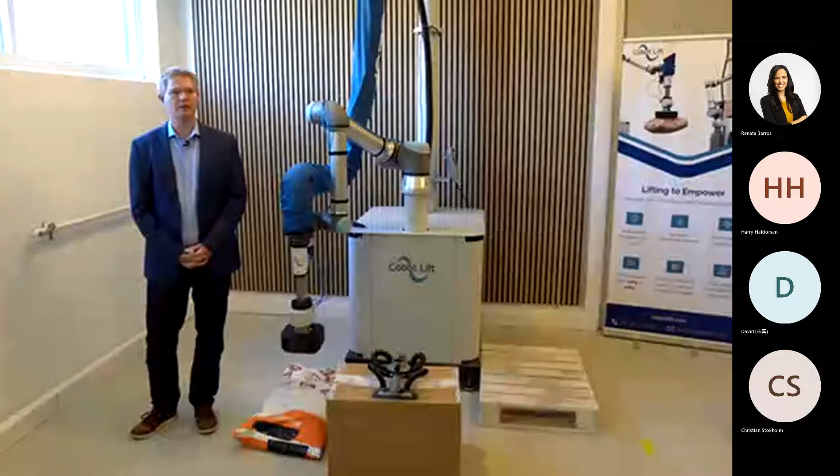My name is Henrik Gulløv. I'm the CEO of Cobot Lift and one of the founders as well. I'm very happy to have you here today to talk about sack handling and how we can use that to alleviate labor shortages in the food industry. We're going to do a few slides to give some context to our solution, and then afterwards do a live demo with the unit we have here next to us. This is a mobile Cobot Lift unit. If you have any questions or projects you're thinking about, don't hesitate to ask or reach out at the end. Just interrupt me wherever you need.

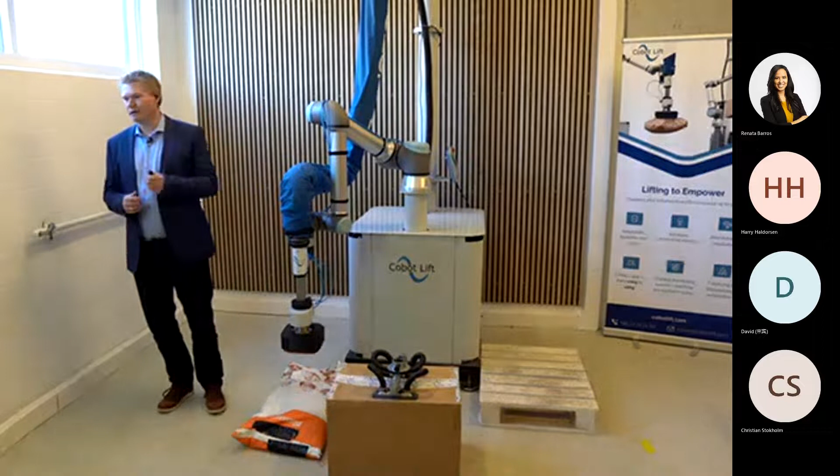So what we're going to talk about today is first a general introduction: what is Cobot Lift, our company, our technology, and then some of the cases we've done in the food handling industry, and then how you can potentially go from here.

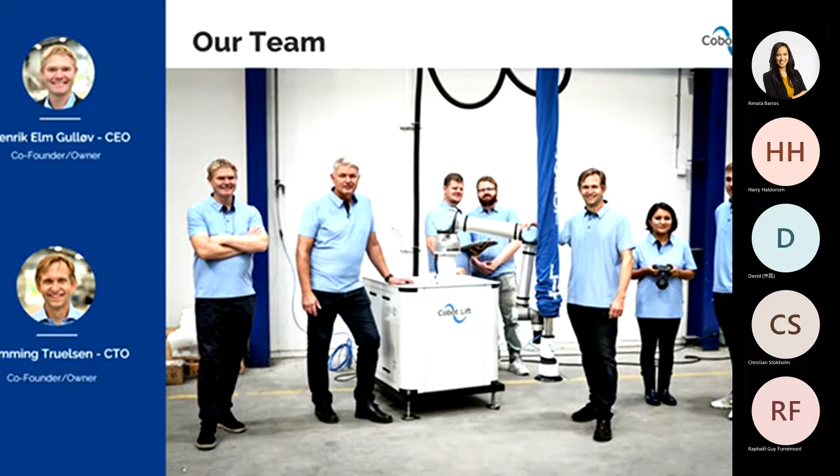So the team today, I'm the CEO, co-founder. The inventor of Cobot Lift is Flemming, he's our CTO. We are the original founders, and we are part of this big family of companies located here in Denmark, where a lot of robotics industries are being developed. There are more than 100 companies here.

Cobot Lift started 4 years ago, when Flemming was asked to develop a solution. He was working as an integrator for a robot brand, these collaborative robots, and the company he worked for did have sack handling, done manually or with just pure muscle power from the individual, which they didn't like for ergonomic reasons. They were also struggling to get people willing to work in this environment, running 3 shifts, 24/7 — a harsh environment with a lot of heavy lifting — and they needed an alternative. They did have industrial robots, but didn't need the speed of an industrial robot, didn't have the required space, and didn't like the price either. So they were looking for something in between: automation that was small but still handled the task of handling up to 5 sacks per minute.

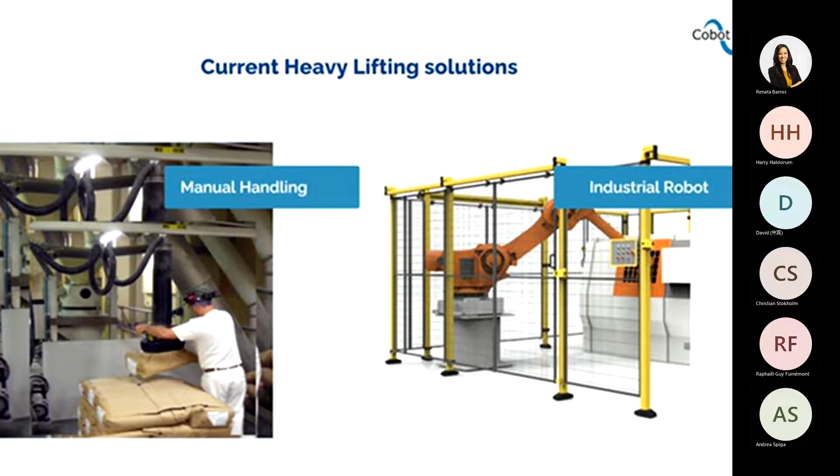That's actually the background — that was the solution we developed back then, and that's the reason why today we have customers across 4 continents and distributors in 27 countries. It's basically because of the Cobot Lift.

We can automate lifting up to 45 kilos. One of the things we're very good at automating is sacks, which is what's on the picture today, but we can of course also lift other things, and I'll show you some of those as well now that we have you here, because we often find customers need sack handling but might also be interested in other solutions.

The space we take up is similar to a human being, so we see a lot of places, for example in the food industry, where we're filling or depalletizing, putting product onto a mixer station where an operator is still working — still the same workspace required as a human being. And because it's collaborative, you don't need fences, so we can automate new places.

You don't have to build a new factory floor to automate. That's kind of our saying. And we're significantly cheaper than the industrial robot installation because it's much larger, needs fencing that drives a lot of cost.

But also because the technology around particularly camera vision systems is really increasing and has really developed. We're coming out now also with solutions including camera. I'll show you some of these solutions today.

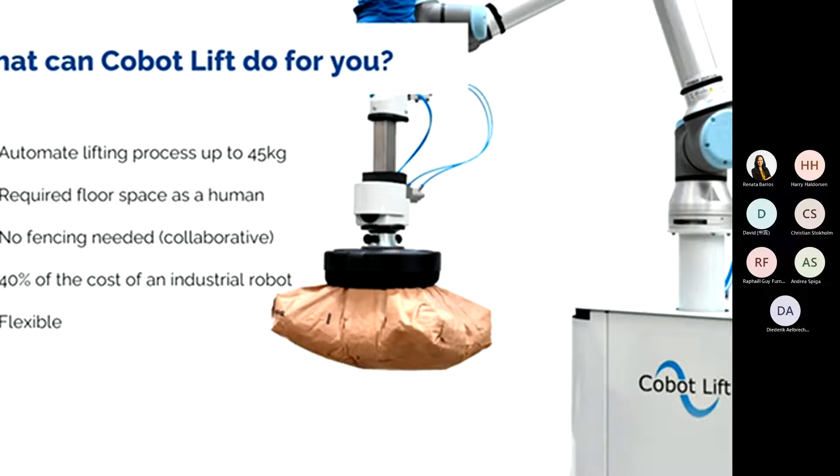The last point of the Cobot Lift is the flexibility, and it is flexible in several ways, but one is the ability to grip things that are different. So in this case, sacks handling, we can actually, with the same gripper at one customer, handle up to 100 different kinds of sacks. That's really important for our customers, that we can handle as large a part of their product portfolio as possible.

So just to get you introduced, what do we have in a Cobot Lift? We have our two main models here: a mobile Cobot Lift and a stationary Cobot Lift. The three ingredients that are in both of these units are a collaborative robot and a vacuum tube lift, that's really giving the power of the system. Then there's the Cobot Lift, which is the combination of getting these two technologies to work together. So that's the hybrid that makes the hybrid work, this hybrid technology. The mobile unit we have is like a Euro pallet in size, and the stationary we have is 40 by 40 centimeter measurement on floor.

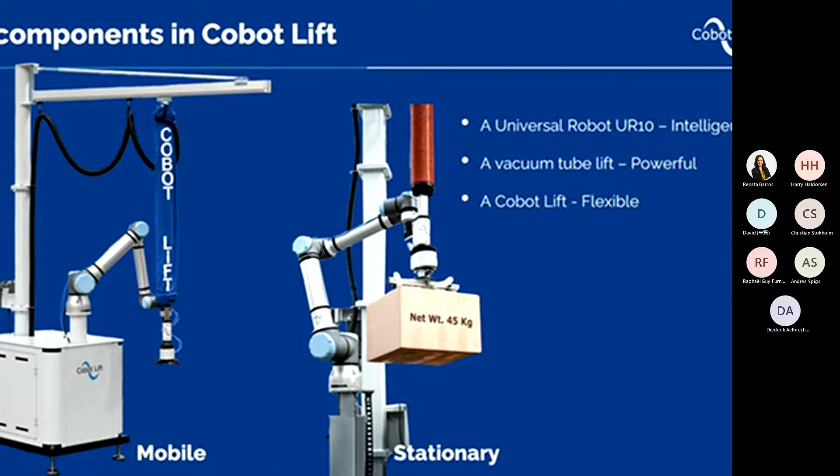So just to give you an idea about when I say that it can fit into small spaces, it really can fit into small places.

So today our focus is around sacks and the challenges you're facing in your industries. We do, as I mentioned, have a number of other applications, but we will today focus on sacks. And we do also, I think that's important for you, have customers in the food handling industry.

I'll show today a case for Parathas. We also have customers, global customers like Colgate, which is installing a lot of these units, actually also using existing vacuum tube lift units and then converting that into a Cobot Lift. That is also a possibility.

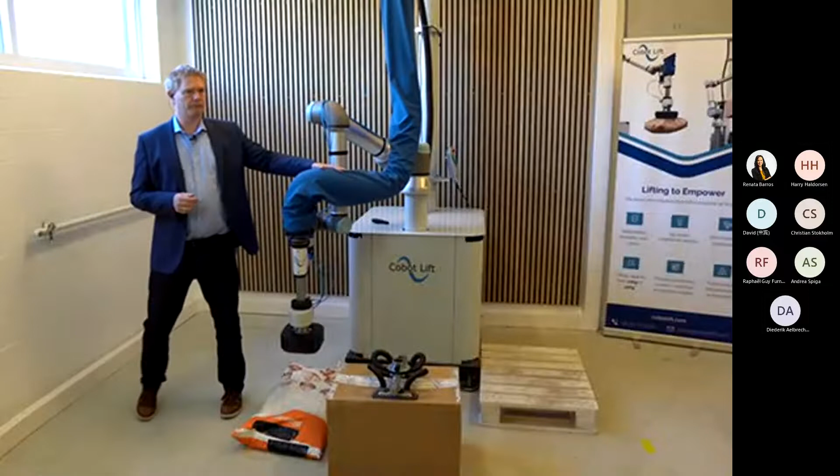I think before we go to the case, we should do a live demonstration because that is probably bringing it most to life for you. Christian, would you start up the Cobot Lift here?

So here you can see this is the mobile unit that we talked about. This is the vacuum tube. And here we have a sack, a 25 kilo kraft sack. It has some flour. We really see a lot of different sacks, to be honest. This is the Cobot Lift tool, and here we have the collaborative robot that's guiding the system, you could say. So the vacuum tube is doing all the lifting, and the robot is really guiding the system.

One of the things when we say, what does it mean that it's collaborative? It's a question I get very often. It means that it will stop when it meets resistance. So I'll show you two fingers, and then I'll show you how quickly you can stop the system. Being collaborative means it has very low impact force tolerances, so the employee won't be damaged by being hit by such a system. I think that's really important.

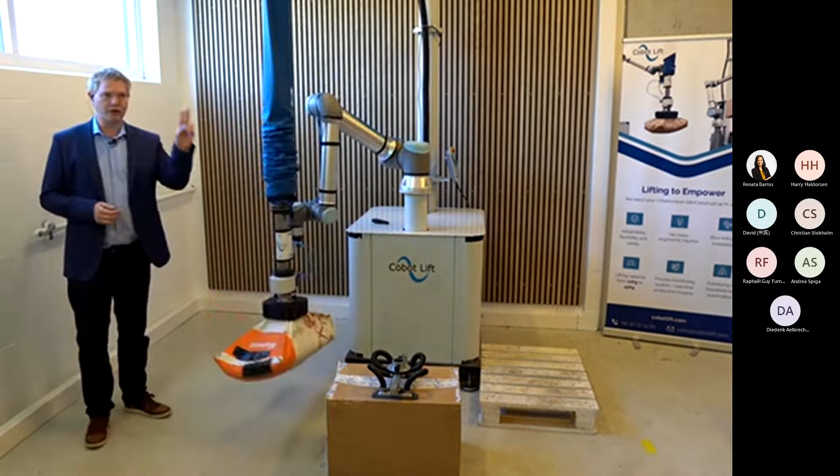I think I will show it one more time because I did it very quickly, two fingers. Then we just have to wait till the system is moving so I can stop it. It's really key, this functionality here, for many of our customers. We can take up to 4 sacks per minute. Right now it's not operating at full speed.

So that is for the sack handling. We see sacks of many different sizes and shapes and ingredients. As in the food industry, the last thing I did was testing on lifting cocoa beans for depalletizing. That was the last test, and that's one of the things we also offer our customers: if you like, you can send product to us, and we can show that we can lift your product.

So flour is of course very common, but it could also be food additives. We have several units there. It could also be, of course, salt and so on. So basically both bags in paper quality, but also in plastic quality, thin plastic or thick plastic.

Now this here, we made it so it's easy to change grippers, but I want to show you this gripper because this is actually our patented technology.

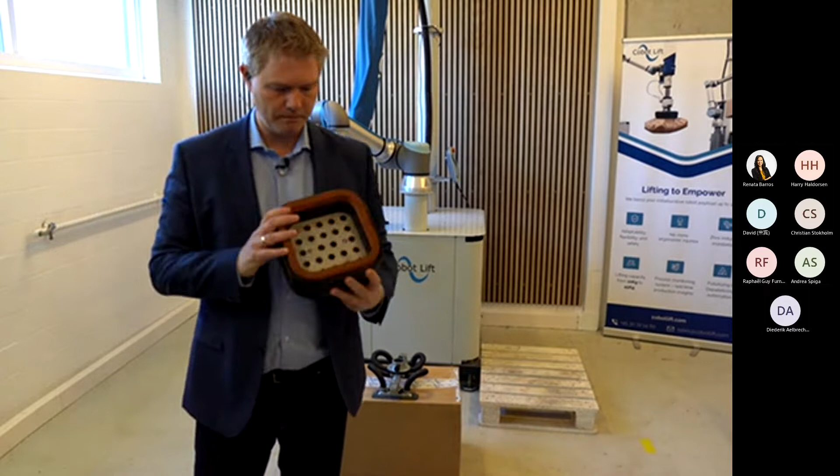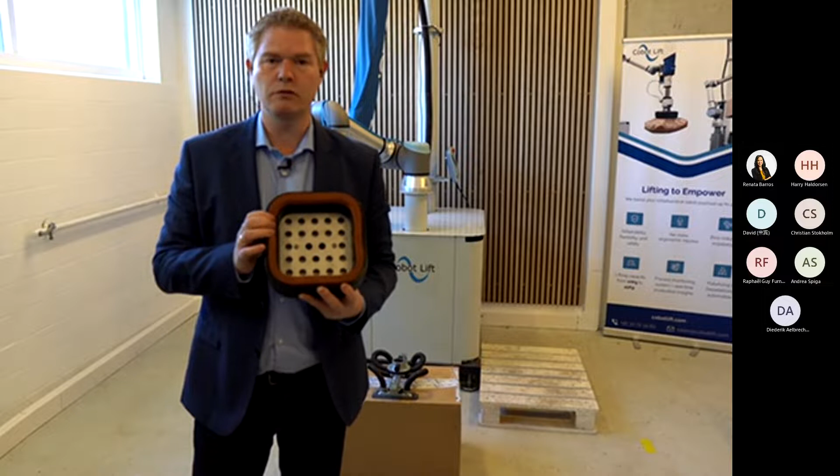You have the foam that actually is made so that it goes into the gripper, and that's very important. It doesn't bend like this, but it actually goes into. One of the things that's very important in the food industry is avoiding contamination. So when it's going into the gripper instead of going like this, you don't get friction on the sides.

And there's no crumbles going into, for example, a mixer station. Also in the food industry, this is not a food approved foam, but we have another foam that is food contact approved.

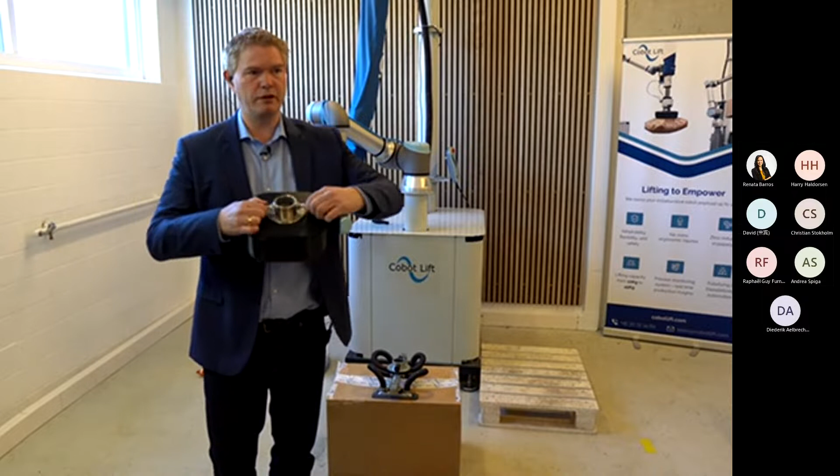That's also very important for some of our customers. Then on the top of this gripper, we have our quick release system. It's very helpful here in doing the demonstration that we can just with 2 fingers release the gripper. But it could also be important if you need to use different grippers to handle different products.

So I promised to show you also a box. I'll just show you how we handle a box, because I find that sacks are going into the production, and then often it's boxes coming out. So I thought I would show you that as well.

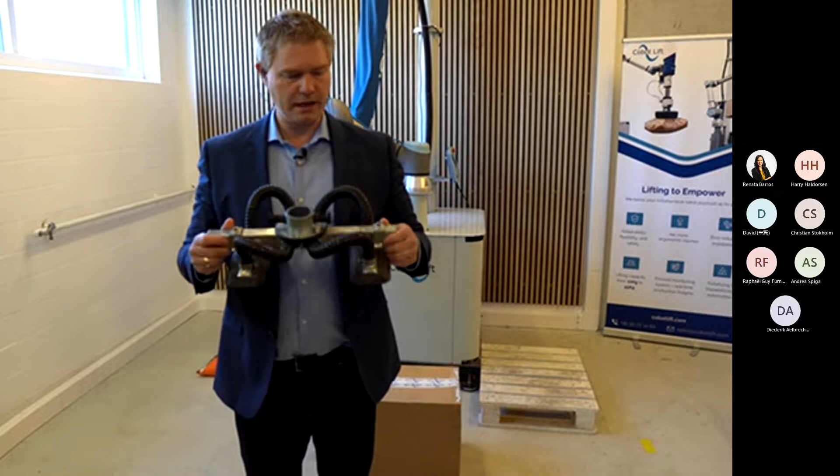So I'm just going to do the introduction here. This is another gripper, a box gripper, and it can actually adjust where the suction feet are, so you can move them forth and back to whatever the size of the box. You need to avoid touching the tape here in the middle, then it's not so good at creating vacuum.

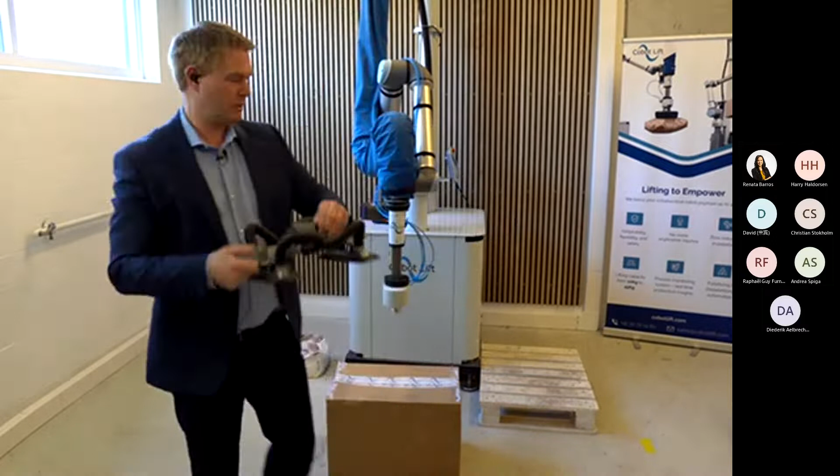And this one is mounted with our quick release system, so you can easily click it on. I'll just show you. And then in this application, you can see that this could be for box palletizing, for example, or depalletizing, whatever you require.

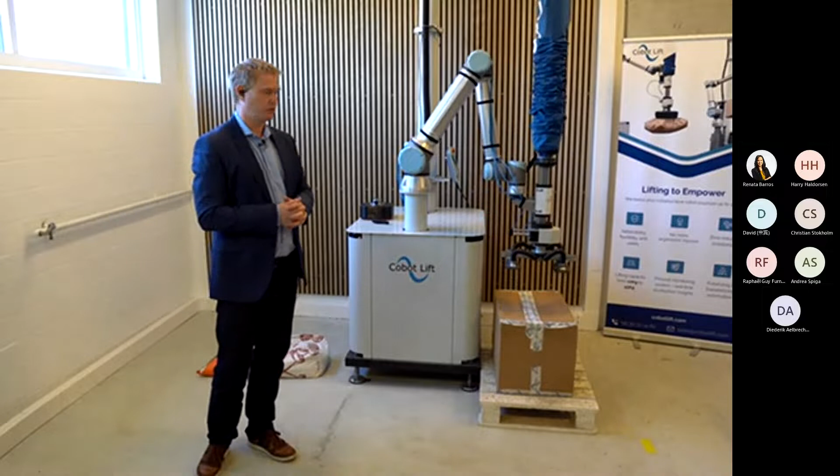It's actually also possible to have a solution like this where you palletize up to 2 meters of height, if that would be what you require to fill your pallets completely. For moving them, for example, with trucks, it's good to be able to palletize high, so you don't pay for moving only air.

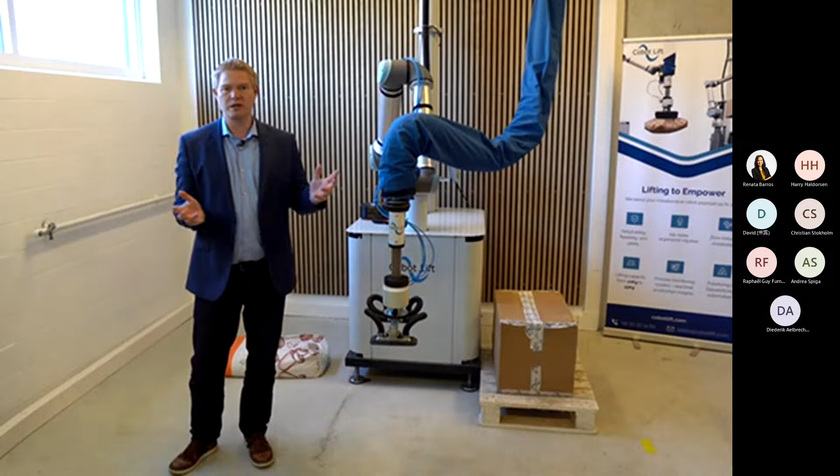Good, I wonder if there are any questions from the audience. Now is a good time. Hello, Henrik. No, not so far. Okay, that's good. Thank you.

Thank you. So I think we've shown you some of the easy things that we can use our system for. I want now to go towards a case that we have done for Puratos in Austria for a system that we are using for them. I'll just talk you through the case so you have a little bit of background, and hopefully this case resonates with where you are in the industry or the challenges you're faced with. Then afterwards we'll show a video, but maybe just introducing the case here.

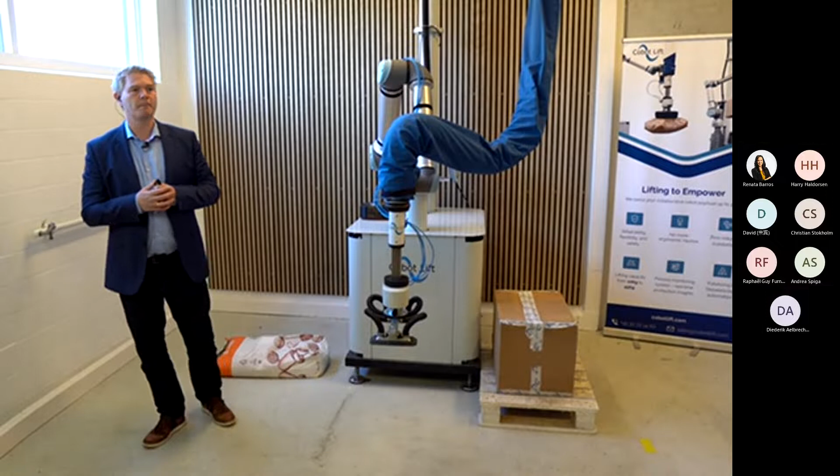So Puratos came to us during Corona and asked if they could install, or we could install, a unit for them in Austria. It was a mixer station. The challenge that they were facing was they wanted us to integrate on existing lines, and when you see the video, you can really see that there's a lack of space there.

What they experienced was a lack of manual labor. They had to hire a lot of temp workers. That was driving up cost and diluting their corporate knowledge. So that has really been a challenge. I see that not in this case, but in other examples. We've had examples where labor shortage could be up to 20% impacting, so you were running 20% under throughput capacity.

So this. Hello, Henrik. Yeah. Sorry, before you move forward with the video, we got a question. From Raphael: regarding the safety, the demo you showed with 2 fingers, does it also work in case of shock with the bag, cardboard, for example?

If it's with the cardboard box, if we can, yes, but also the safety is the same, the safety is the same. Maybe I'll just demonstrate, it's easier. One thing is that I'm talking, but another thing is just showing.

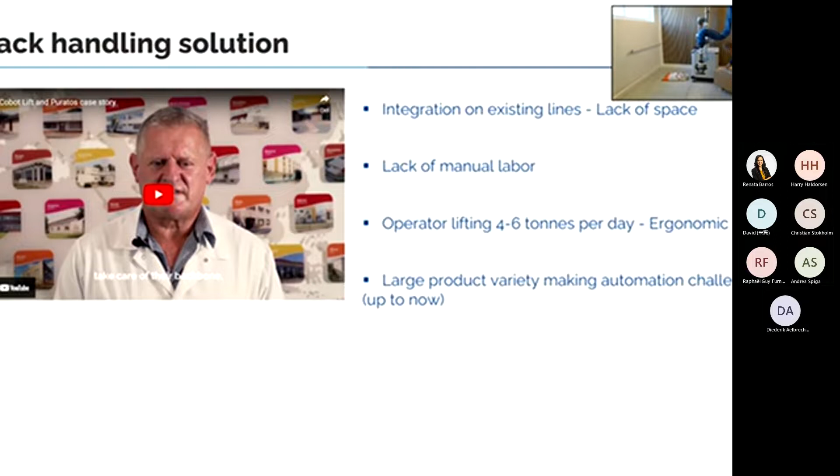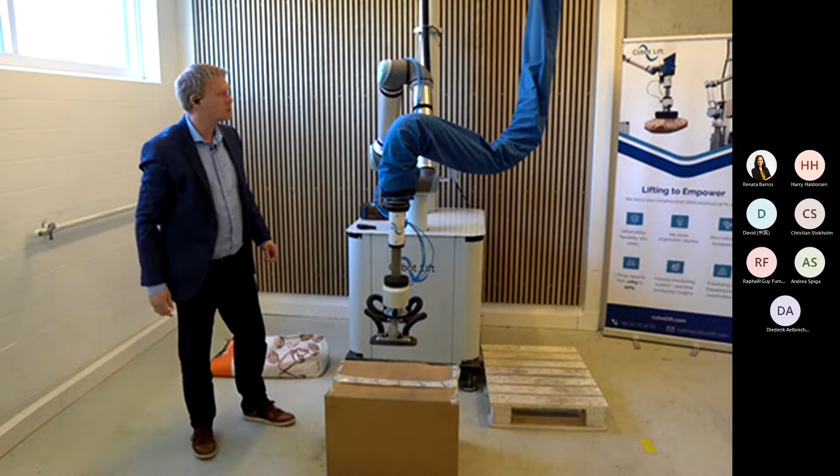Now I just need to make sure that it's where the robot will be. Christian, would you turn it on again, and then we can just demonstrate the safety here?

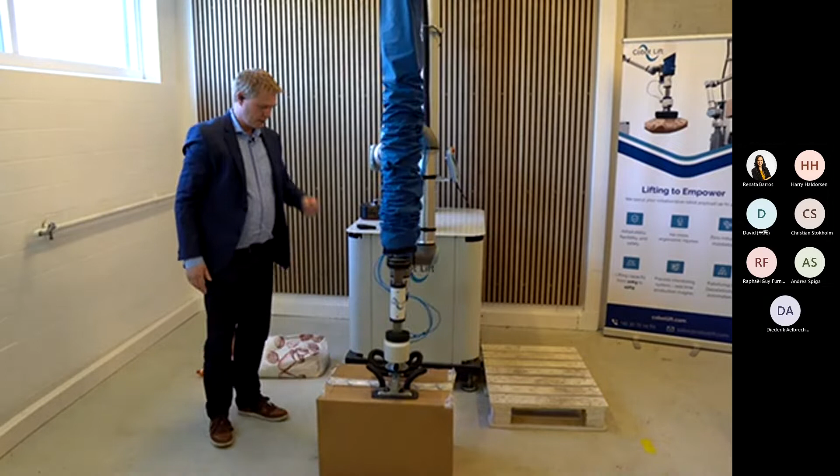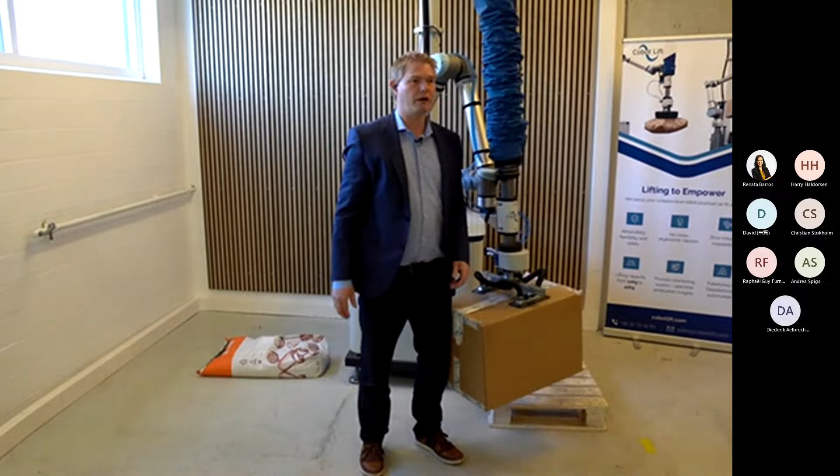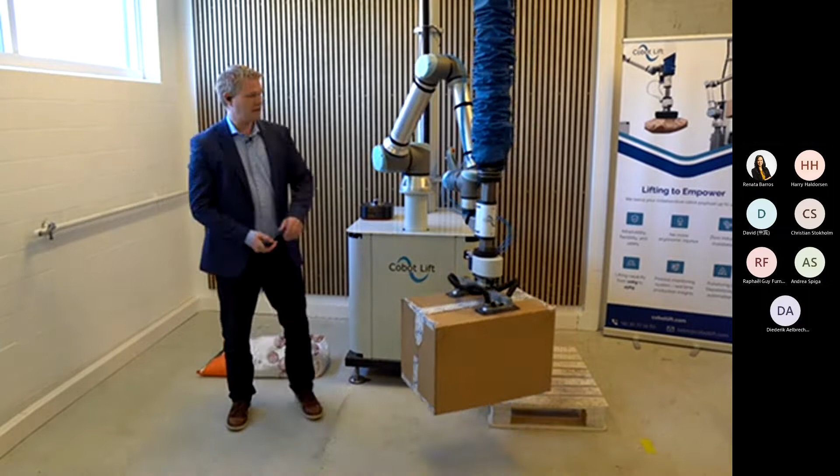So it's a very good question, just to clarify as well, of course. I'm just standing in the way here. If you were here, Raphael, I would ask you to do it. But you can see my leg is still working, so it's really very light impact forces. It is the sensors in the robot that we're using, so we've done a lot of tests and technology development around that actually. But good question, thank you.

I don't know if there were a follow-up question there, Renata, or I could continue talking about the sack handling. Just 1 second, please. No, thank you. Raphael said thank you.

Great, so you know the challenge. You are in this industry and are facing the challenge every day. The case at Puratos was that the operator was lifting 4 to 6 tons per day. So they only had operators working with them for a maximum of 5 to 10 years because of the ergonomic issues, then they would have to find different kind of work. After Corona started, they were really struggling with getting people that wanted to work with these heavy load lifting. And the last challenge was the large product variants, up to that date it's been difficult to automate handling so many kinds of sacks. They handle more than 100 different kinds of sacks.

So Christian, would you maybe show the viewers the case here, this is for visual guided depalletizing, this case here, maybe that's important to say as well.

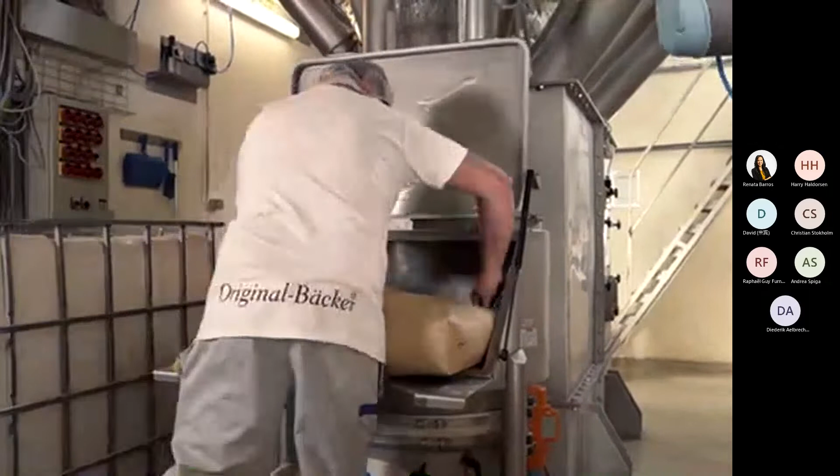So if this drives some specific questions, don't hesitate to ask. Let me describe a little bit what the application was here. We have set the Cobot Lift on a column, existing infrastructure, so you can say it's not a stationary or mobile version, it's actually a custom or tailor-made version.

We've added a camera on top which detects where the bag is and then moves it to the mixer station. Previously there would be up to 3 people working this, 2 people emptying the pallet and 1 person cutting open the sacks. One of the benefits besides getting rid of the heavy lifting, because the focus of the operator is really on emptying the sacks, they actually say the cleaner came one day and said there's not that much to tidy on this line anymore compared to the other lines. They also get more out of the sack, so it doesn't create as much dust. I think these are some of the side benefits that we didn't know when we were starting this journey, and it's very interesting to see the customer had these gains.

Christian, would you turn back to the slide, because I think it would be good to put a few pictures on.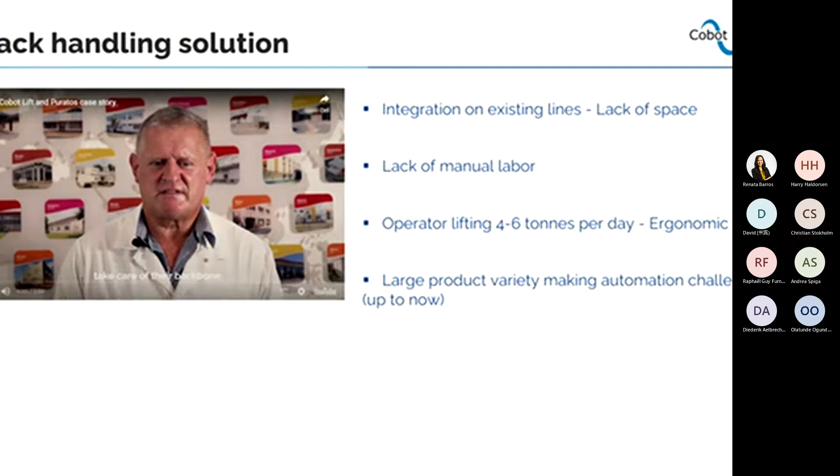Just to explain, you saw it only momentarily in the video, but this is a picture from the installation done at Puratos, and you can see the camera is really hanging above the solution. You can see an example of the camera detecting the object below and then hitting for about the center of the sack, and that is what the camera does.

Now the system we have in Puratos is also mounted with a flex joint at the end, so it means it's not so important if it's completely flat. The thing it needs to suck up on the sack can also be a little bit uneven, and then it will just bend toward where the product is the most, effectively creating vacuum on the product.

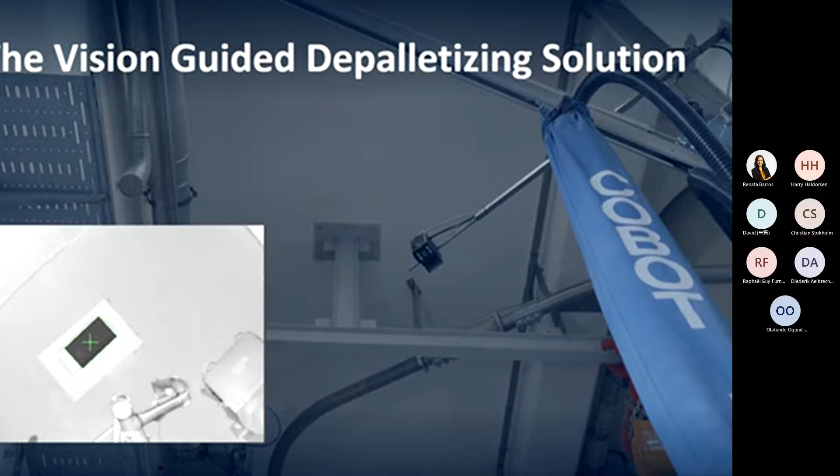I don't know if there's a need to go into the technical specification. We're very proud of having this vision guided sack depalletizing. We're selling it as a complete unit, as a solution, but there's a lot of technology in the back here. The key message from a consumer perspective is that the prices and the abilities of these systems have increased dramatically over the last 2 to 3 years, and we have a very price competitive solution here with the vision guided depalletizing solution we have.

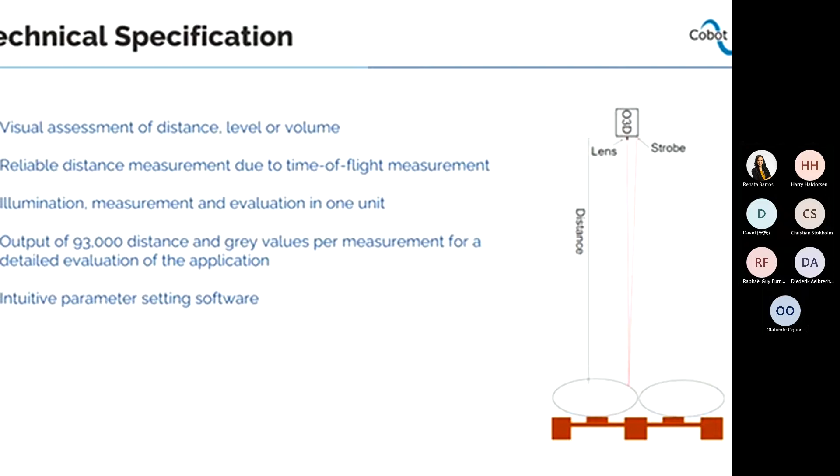This is our remote access system, so we can remote control the robot. Today, when I asked Christian to show something on the robot, he did it remotely using an internet connection. We offer our customers the same thing as part of our standard solution. So if an operator pushes a button and doesn't know how to fix it, instead of waiting 1 to 2 hours for a technician to come, he can call and we can get it fixed immediately. We find that actually 95% of challenges, when support is needed, we can solve remotely. So it's been a really great tool for us and for the end customer.

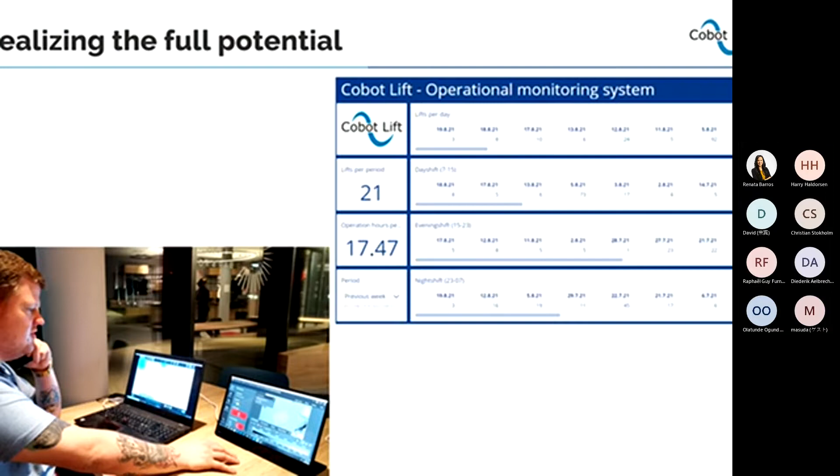In terms of next steps, if you're sitting out there wondering, okay, you think this is a great opportunity, how do I move from here? There are several ways, and I want to lay out a few of the steps we typically see our customers take. First of all, there is a clarification stage: can we lift this product? Is it technically feasible, and so on? It's always good to be sure, so we really encourage you to contact us or our distributors and get that clarification done.

Typically, we have a little questionnaire that you fill out, and then we can make the assessment based on that, whether we fulfill your requirements. From there, it's really about how complex the installation is—is it something we can just plug and play, or does it need a little development work? Alternatively, we've seen for some customers it works really well that we have a video where we are lifting their product; it helps the discussion with the operators and brings them along the way, realizing the full potential of the system.

So those are some of the ways you can go, but it really starts with just reaching out. We have some email details here; you're very welcome to contact us and reach out. We will of course also be sending this presentation to you, along with the case, so you can take it forward. I don't know if there are any final questions or comments, but otherwise I will let the show stop here.

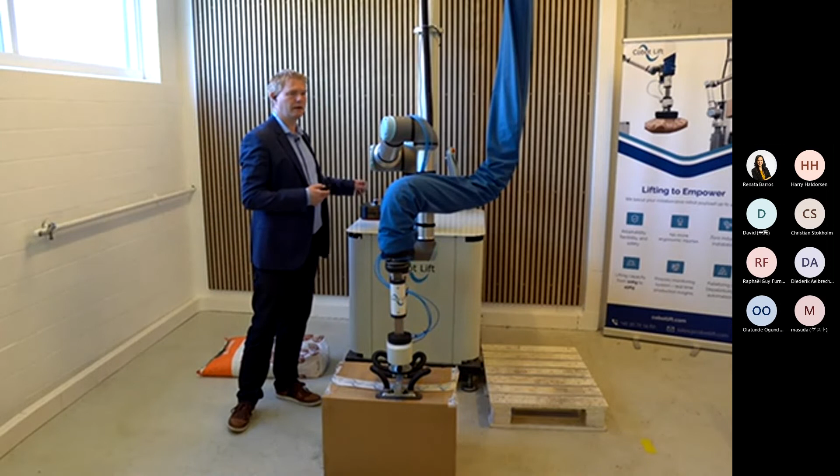Mainly there is the power cable and the compressed air going to such a unit. The compressed air we've included now in the system actually developed for the logistics industry, but we still have the power cable there. If you want to make it fully mobile, we need a really good battery to handle a 3 kilowatt vacuum pump. So the unit is rather high, so there is a consideration there to be had, but it really depends on the use case.

So that's the short version. But reach out afterwards if you think you have a good business case or an interesting application, then I'm happy to have that conversation.

Okay, thank you. I saw that Raphael was writing, but if there are any questions, Raphael, I can unmute you and then you can ask directly. Let's see if maybe it's easier here. Allow mic. Okay. So your mic, Raphael, it's on, so you are free to ask any questions.